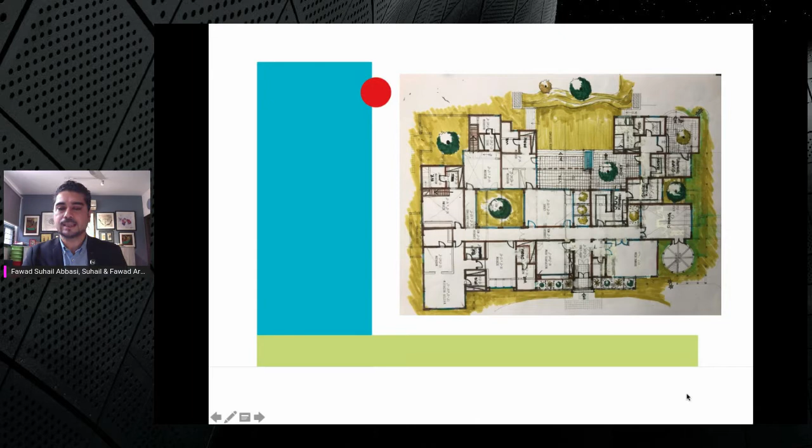We've also realized that as the lead designers or lead architects of all projects, we need to have solutions for each and every aspect of the building we're designing, and we need to clarify functionality, connections between various spaces, use of materials and color, and also enhance legibility. There's absolutely no way you leave that to your subordinate or your engineering associate. Every aspect of your design has to be dealt with yourself as the lead architect, the lead consultant on the project. The elements of design for us are almost always inside out, because we feel these connections are crucial to our philosophy.

Whereas layouts are established with 3D visual studies, once the space program is formulated, many ideations are done simultaneously to study and form the building type. It could be a house for a smaller family, or a large farmhouse for lots of people, or maybe very limited people. But these aspects are always discussed with the clients. They're given knowledge of what really needs to be done, because at times you meet people who always want more, so we educate them on the process, because the spaces are crucial. The importance of these spaces is very crucial to the design of your building.

Since post-COVID, we've been able to really convince our clients that they need to work on smaller buildings and work on the landscape part of it, so that you can be outdoors more than indoors.

Or even if you're indoors, you're in the outdoors. As you continue to learn, we also seek to establish a careful, emotional, interactive use of light and color in a very subtle manner. We are always looking for solutions that satisfy the aesthetics, feeling and well-being of the people.

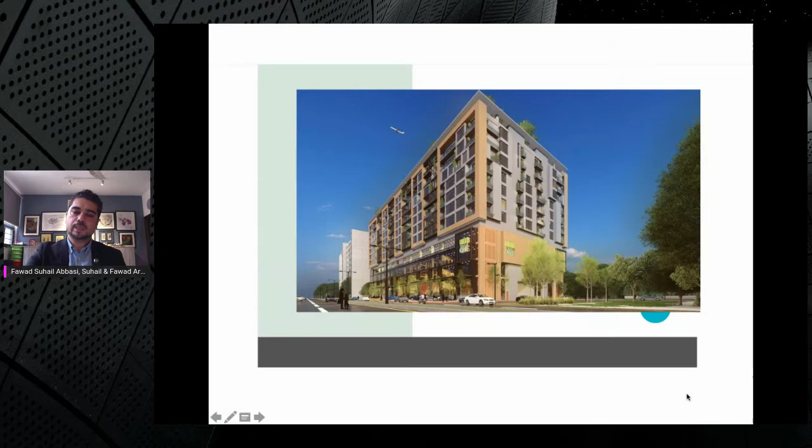Our office is based on not just the matter of architectonics or something mechanical. We've always looked at a building as an art form. The identity of the office in the last few years has become about really experimenting with materials, brick being the favorite, but how brick would complement other materials, because it is something more lasting. It ages very beautifully, very gracefully, and we always try to reflect our philosophy in whatever we create.

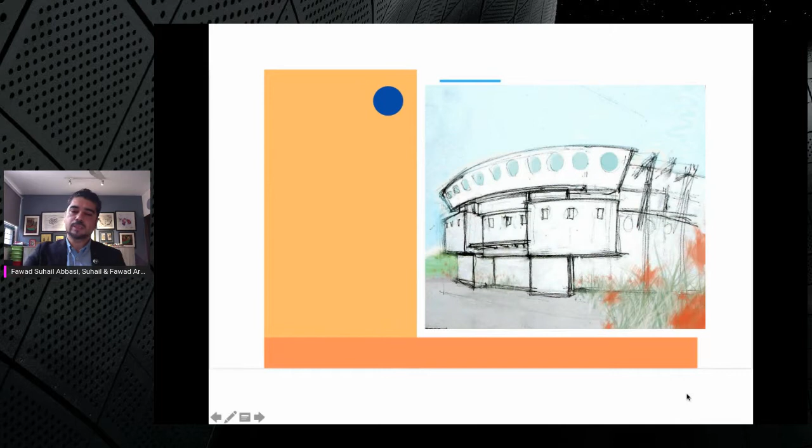It's important for our studio to start a project once we've specified our materials rather than saying we'll think about it later. Every time we design a building, we've always tried to make sure we specify the materials. Many times the clients that come to our office, I'd say about 65-70%, come for buildings in brick because that's our design style. But even if we are looking at a client's pigmented plaster building, with brick or without, we specify our desire to really understand it first before starting the building design.

For us, it is like putting together a piece of Lego, or blocks, juxtaposing them by leaving multiple vacuums as breathing corridors, like subtracting from a series of blocks. This leads to private, secure, unobstructed views from every room. It also helps achieve good airflow systems due to self-created voids as a natural transition. I mean, we do intentionally look at building types

as an art form. This particular building, the Polo Complex, which we were recognized for, received an honorable mention a couple of years ago. It's a rather large project, and we were able to convince our client to really work with brick as a permanent material. What that did is there's absolutely no need for any paintwork later or anything else, and it's really grown out of

the green areas around it that we've developed. So this five-phase project, we did the landscape, the infrastructure, the architectural design, and many other elements of the project. We were able to define these courtyard buildings, these brick buildings, as a major idea for future extensions inside the complex.

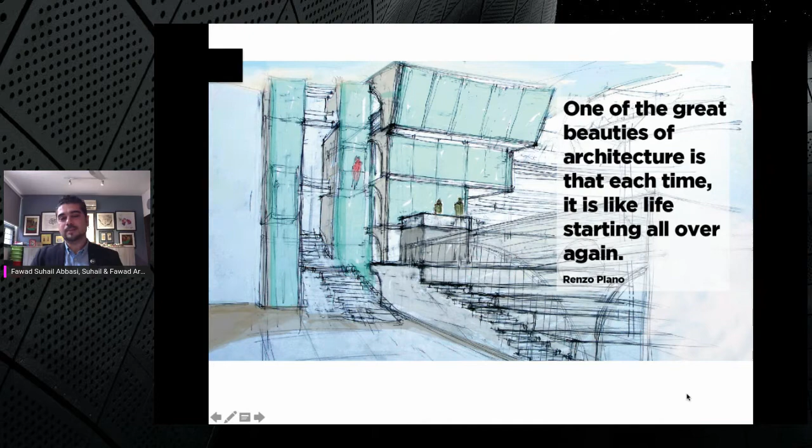If you look at the sketch we did for a project a couple of years ago, we cannot put away design and say, listen, I'll look at it later. No, color and materials will always be dealt with together as one whole.

If you look at a building type, the materials are always necessary and specifically designed for that building type, meaning we come up with forms and ideas close to what most of the clients that come to us want. They do talk about using a certain material, and they come to us because they want to look at more permanent materials.

This is a really important sketch I thought I'd share with you by my father, from when we were working together on a project a few years ago developing a hospitality building. Proportion and details in my work are what create an intimate monumentality and a grand yet intimate scale.

When we were working on this, we were looking at the transition of the plan and its development. By the end of it, we were able to do a brick building with fair-faced concrete. I just thought that at times we feel we're such hotshot designers when we're out of school that we forget to experiment.

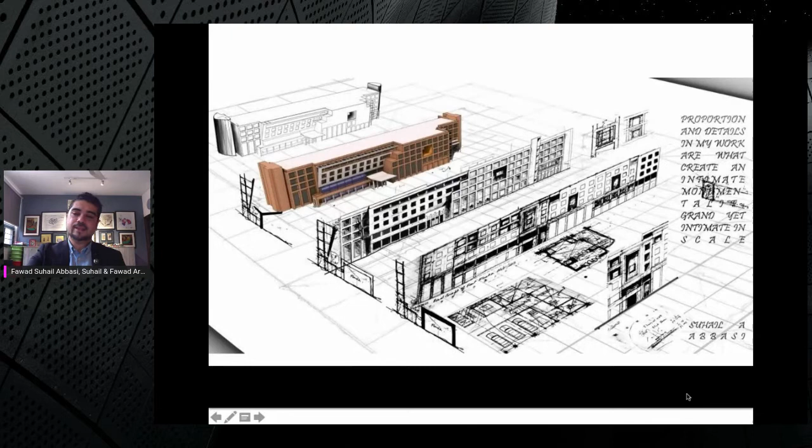Someone who's been out of school for over 50 years, like my father, still believes there's no ending to learning. So I think we all need to understand that these transitions, these phases, are very important to our design. The concept is always simple and straightforward, and we can focus on the transition between indoor and outdoor, creating multiple introverted landscapes.

I think it's something so apt and appropriate to the different elements that we as architects many times don't realize. As architects, we have multiple tasks and an endless varying range of formal challenges that we have to find solutions to.

We talk about the number of things we have to do as architects — there are many. We have to first look at designing. Do we ever get a chance to sit and only think about design? Never. Do we ever?

Then we have to think of the new projects that we need to bring in to run the office. We need to look at deliverables, the processes in producing the number of drawings required to be submitted initially for approvals, and then of course the working drawings and construction drawings. So many different elements that we need to look at.

This sketch I'm showing you is of an under construction building, the one I talked about earlier. The 10th floor of this mid-rise building is a sky park at the top, something I'm looking forward to enjoying in the next couple of years when this area is developed. From day one, this building was designed with the sky park in mind, and it's still improving with time. Whenever I go back to the site, I enjoy how the building has transformed.

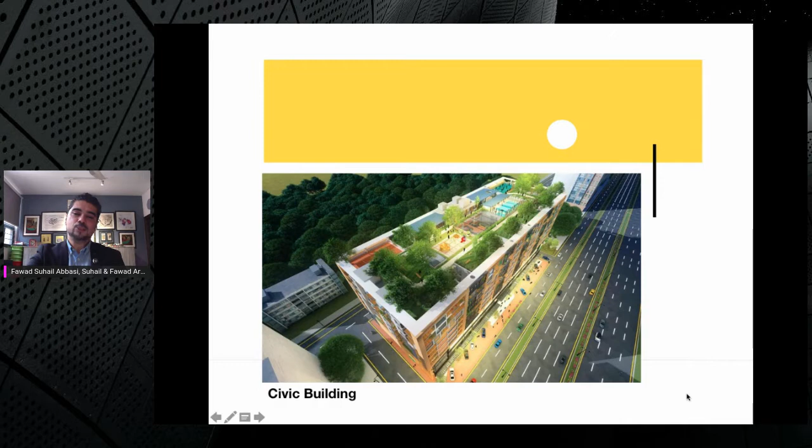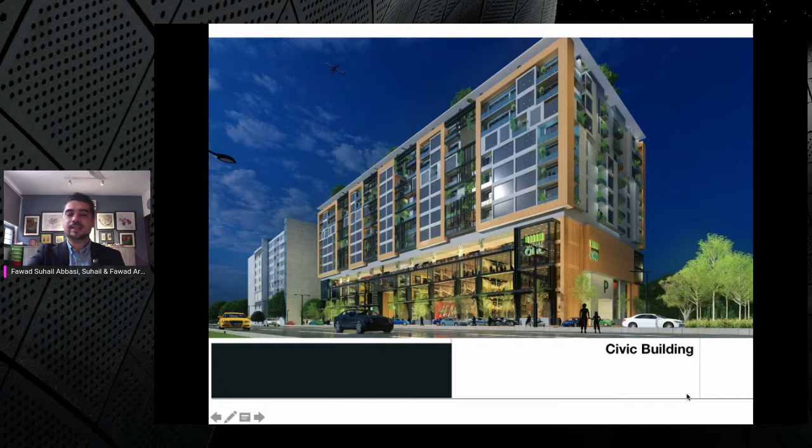Like I said, it is a brick and surface building with major elements of landscape, texture, and color. As we go along we look at all these elements, and we try to show there is never an ending to really studying the materials and how they weather with time.

And of course light plays a factor. Night lighting and how these lovely walls and the color need to be optimized and showcased at night, because landscape all around becomes a major factor in how the building will kind of rotate around it, and how it will relate to the landscape.

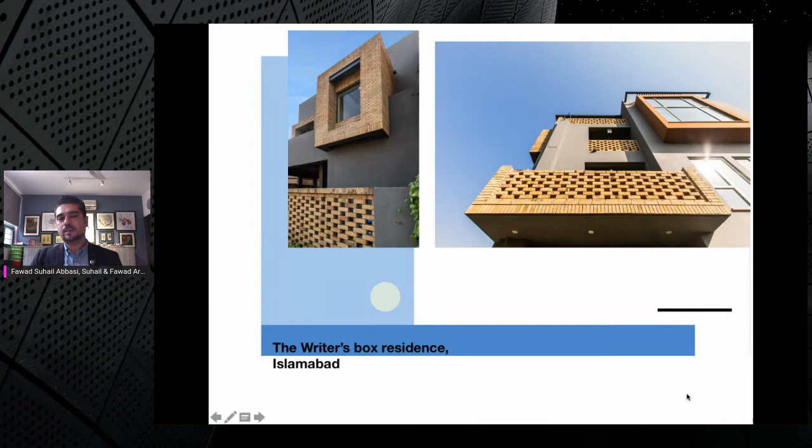As on a daily basis, whenever we're doing a new building, this exposure to the available materials and the history behind these traditional elements has actually been really important to how we now look at architectural design in our studio. So one more view is that architecture has a subtle but huge influence on the community.

You may not live in that building, but as you pass it, you will inherently be affected by its presence, which influences you regardless of whether or not you are aware of it.

This is so true. You can always notice something that is apart from anything which is average. I won't know if average is the right word, but you always notice something good. It could not just be a building, it could be anything that is out of the ordinary. It stands out. So a good piece of architecture is always important and always leaves a mark on you.

So design is a blend of respect and negotiation for the aesthetics and ideas that can make each project. I completely agree with this quote, and that's how we work around it.

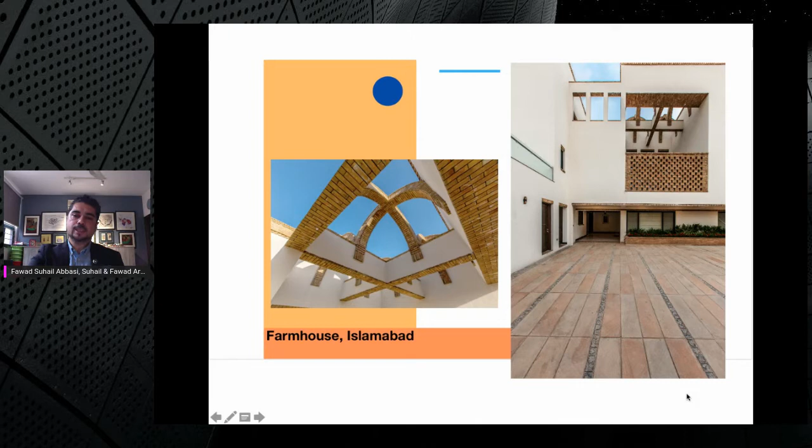So this project, the jali that you see on the right, is a courtyard on the ground floor level, which is of course for the house done for a family who wanted a space that could really be a space they could sit in and nobody could actually look inside, but then they would be careful in terms of how it's placed.

Again, in the courtyard, showing you how the water wall and the entrance relate to the entrance balcony, looking out to the basement courtyard, and how each room — be it a living room or the bedrooms — looks into it without anybody really looking inside that space. It's a very private space.

Every time we design a building based on the requirements coming through our clients, we try to address every single element of it, keeping our philosophy in check, and that has been successful in many areas. Again, like I said, it's a learning curve, a learning element, and we tend to learn from each project that we do.

The interior manifests complete admiration of natural materials; geometrical patterns and styles define various spaces and are attributed across various interior and exterior spaces. This courtyard, wherever it's placed, whether it's an inward-looking courtyard or an outward-looking courtyard, the treatments, the use of color, the use of a palette that complements the exterior materials, and the furniture used always has to work together.

It can never be designed independently, it has to be seen as one. The use of these courtyards and what they're looking at, the landscape around it, the use of color—everything blends together once you design it in totality. How the flow comes along, how the brick jali would react, how the trellis spaces create shadows—each detail needs to be looked at independently but brought together within a larger space. So every time, we primarily focus on the relationship between indoor and outdoor spaces and the human occupants, ensuring that even sitting inside, you're almost outside, to keep the privacy intact. Big jalis are introduced that create micro environments while bringing a formal closure to various spaces within the building vocabulary.

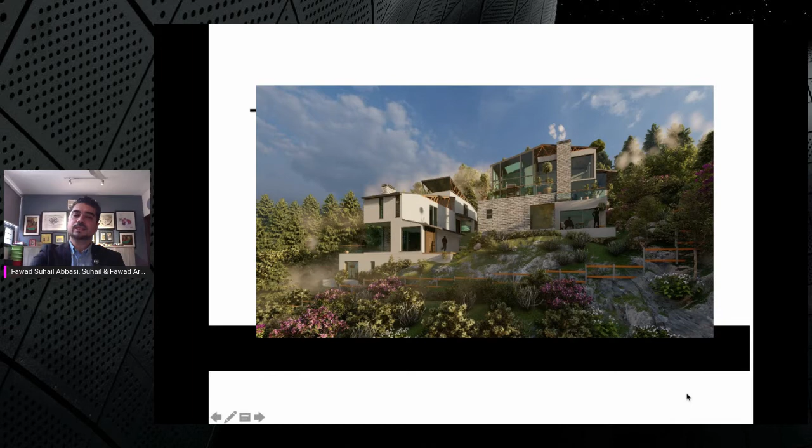Our buildings are humble on many levels: formal, functional, social, technical, and so on. We make a conscious effort to address these objectives in terms of access, pragmatic relationships, wider climatic and contextual factors. At the end, I thought I'd share a sketch of ours.

Design is where science and art break even.

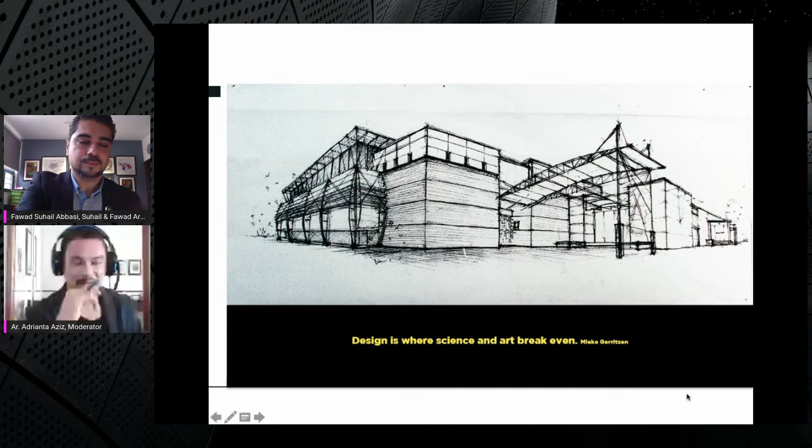Wow, Fawad. Such beautiful storylines, and every great design that you share with us begins with an even better storyline, because the way you portray design and art should be born from the selection of materials and color. For me, Fawad, color is a power which directly influences the soul. Even the materials shape your idea. I think this is talking about the ending part when you say art should be born from the materials and colors itself. It does, it does. Thanks, Adrianta, well done. Yeah, thank you so much. Thank you so much.

When we were growing up, and especially when I became part of a beautiful fraternity of architects, I was able to meet such amazing people that I never thought I could. Each architect, each new friend has taught us something, and I think context is very important to any architect. I think that if you do not celebrate your history, your traditions, there's never going to be a country's architecture that you can celebrate. So it's very important to really go back to your roots once and for all, look at what best you can learn from, what you can pick up from, and then improve yourself as you go along.

Exactly, exactly. I've been to your house, your parents' house. Remember my visits way back, 2, 3, 4 years ago? And then you showed me one of the ceilings made by bricks, and it was amazing. It was amazing.